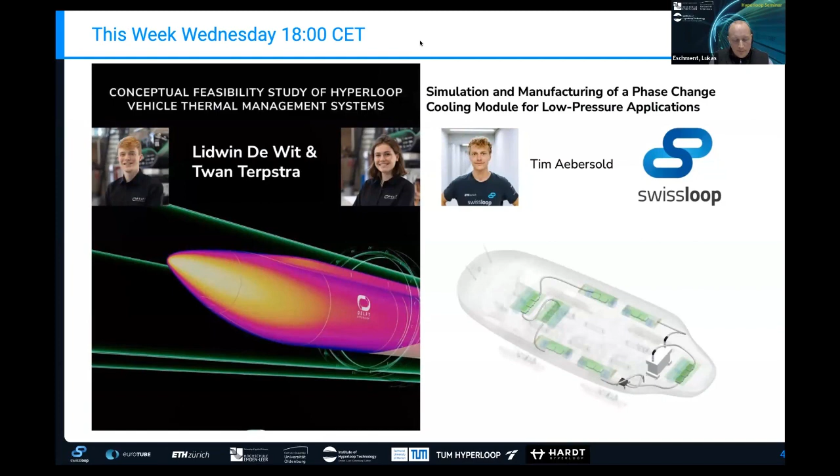So this week, next Wednesday, I hope you all will join. This is a very important topic, I guess, for thermal management systems of Hyperloop. We'll see a lot about the different options, but then also the manufacturing and simulation of a phase change cooling module for Hyperloop. We've seen that last year at EHW, and I hope everybody who wants to take part in next year's EHW can see these talks next Wednesday, because very good talks that we've seen there.

Just an introduction of the hosts, just real quick. Swissloop and ETH started it very early on. I've mentioned that they've put it into the curriculum as well. Very nice to see that Hyperloop has found the way into studies as well, with the teams from Swissloop and then also EuroTube, an organization who is a non-profit, doing research on Hyperloop in an incubator. They will be providing research and development, but also a test facility, and then later on probably branch into certification and regulation.

We have the Institute of Hyperloop Technology, where we are also part of a few projects. We are mostly looking at cargo right now, but then also building our own test infrastructure here at the university, where we'll have a vacuum chamber, and then also looking further to a big, large-scale research infrastructure that will enable something like a 32-kilometer continuous test track that allows for certification of Hyperloop at the end.

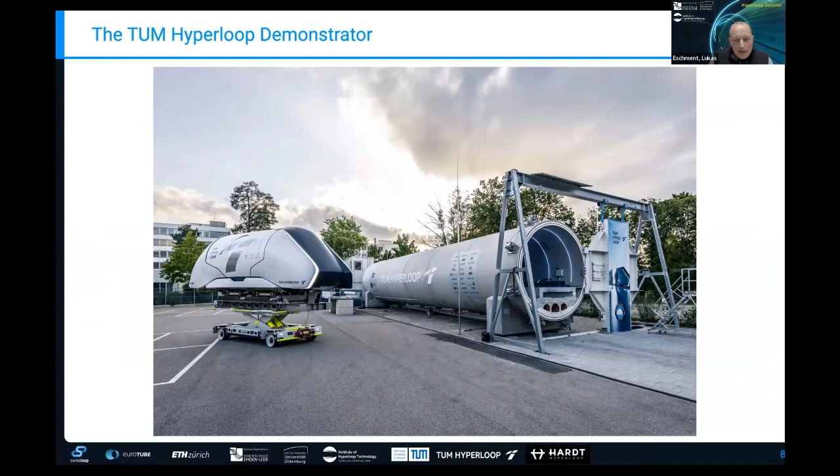We have TUM in Munich with a demonstrator that you've probably all seen recently, which has been finalized in the summer. You probably will see a little bit more about that soon.

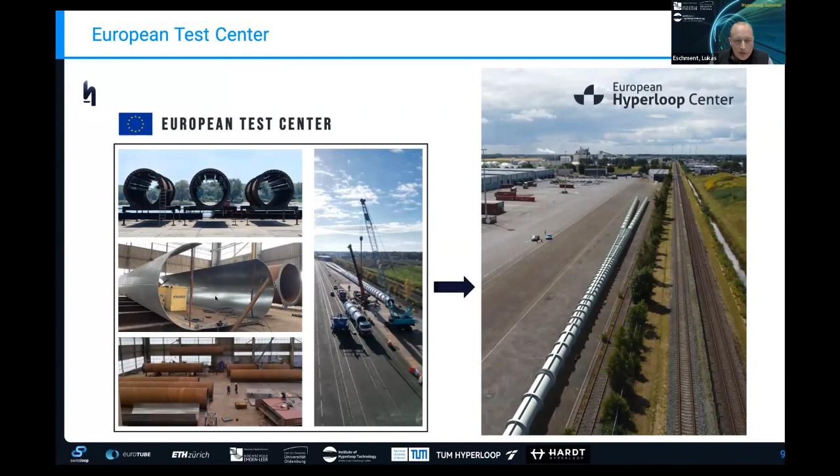Then we have the European Hyperloop Center in Groningen, in Veendam specifically, that is currently being built from Hardt Hyperloop, where you can really see that the tubes are laid down right now. It's very interesting to have a switch integrated there as well, a magnetic switch for the pods, to see that for the first time. That's what it will look like when it's finished.

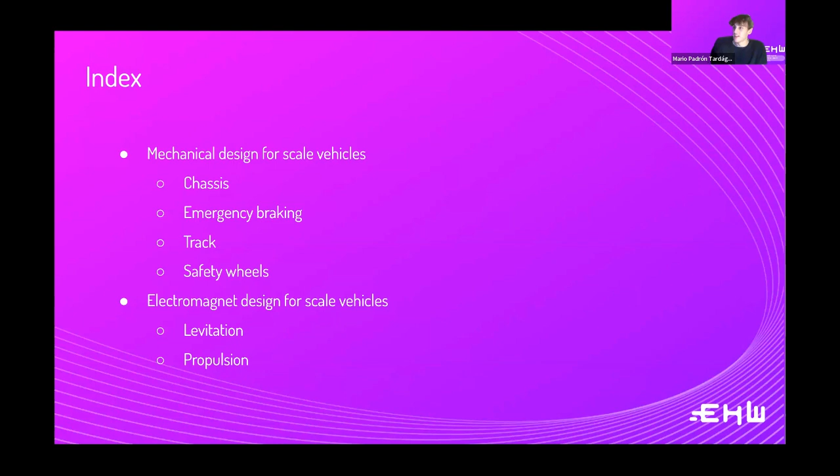There are several parts in the mechanical side of the prototype. We can start from the chassis. We'll focus this session especially on a complete system, since it's easier to provide an overview this way, but feel free to apply this to your specific situation if you're only building specific subsystems.

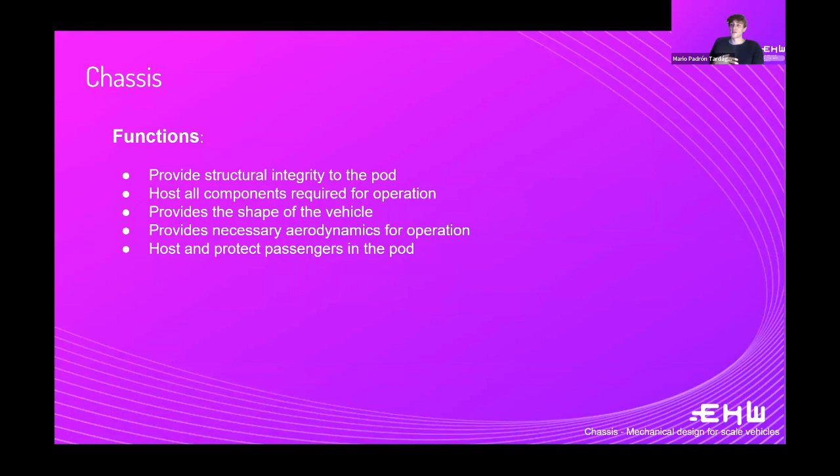The chassis is mainly in charge of providing structural integrity to the pod. It has to host all the different subsystems and keep them in place. It also greatly determines the shape your vehicle can have, and on top of this, the chassis can also be the structure that provides the aerodynamic characteristics of the vehicle. In the future, it would also hold the passengers.

I wanted to include a few inspirations that a lot of teams take from existing industry. For example, an aircraft frame. This is really good, especially in aircraft, where we have a pressure difference between the inside and outside. This circular shape can provide a lot of benefits, including reduced weight compared to other shapes. This could be specifically beneficial for passenger transport, where we'd need to maintain one atmosphere of pressure inside the fuselage.

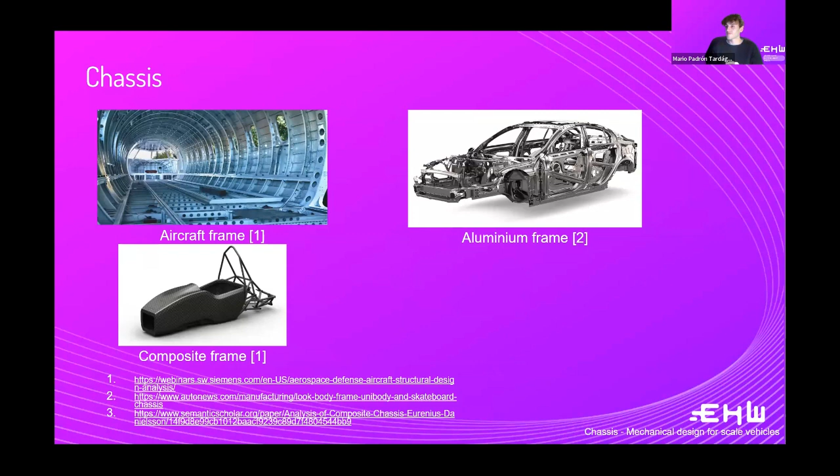We could also consider how a car would work. The teams this year are not bringing passengers, so we don't necessarily need an aircraft frame right now. I think we'd go, for example, for an aluminum structure like it's done in a lot of cars. Similarly, to reduce weight, you could go for a composite frame, normally done with mixes of steel parts, aluminum parts, and composites like carbon fiber.

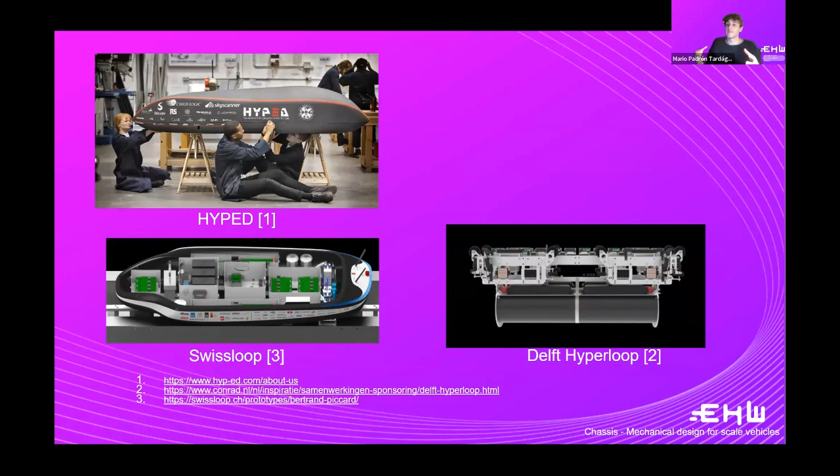Here I have some examples of what teams have brought in past editions. On top you have Hyped's chassis, and on the bottom left you have Swissloop's last year chassis. You can see this one has integrated holding all the components in place and the aeroshell itself to provide the aerodynamics. But in Delft Hyperloop's case, it's mainly made of aluminum profiles, with the aeroshell attached on top. It must be said that if this is done, the aeroshell part also has to be attached mechanically properly — it can't just be held in place with a magnet, for example.

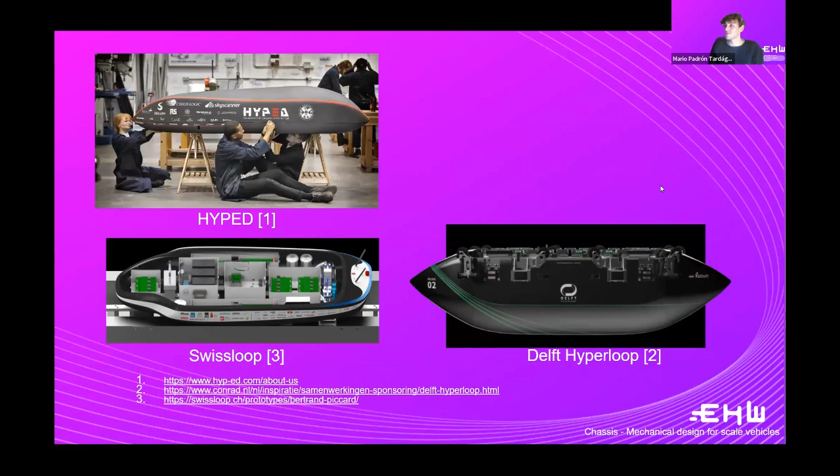Your design will also mainly be influenced by the weight and the materials you choose, as I said, carbon fiber or aluminum. Something we've found very important in past editions for a lot of teams is accessibility of the subsystems. If you have a composite structure that entirely covers the subsystem, it might be very hard to reach specific areas. It's good to take this into account in the early stages, since it can save you a lot of time during testing and make things easier in general.

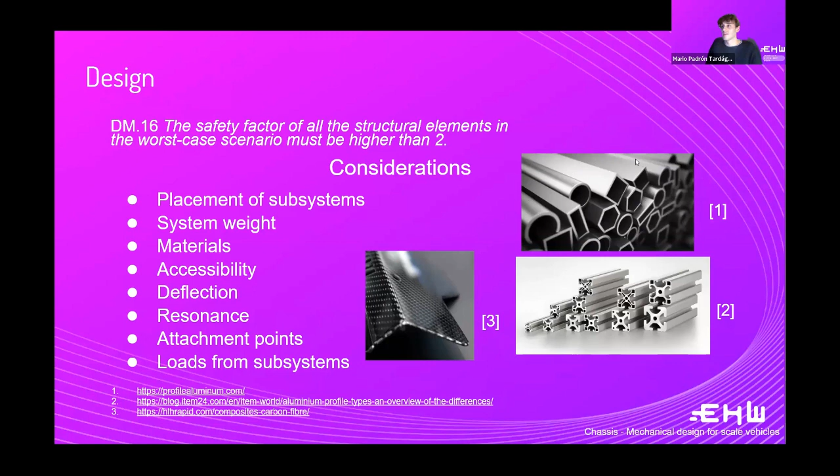Something else to take into account — so you can learn from past years' mistakes — there's a rule stating that the MIDs of the high voltage batteries, must be accessible without the use of any mechanical tools or removing any other parts. As an example, last year Delft Hyperloop's aeroshell did not allow access to the MIDs with the aeroshell on, and therefore the jury required them to make holes so they could be accessed.

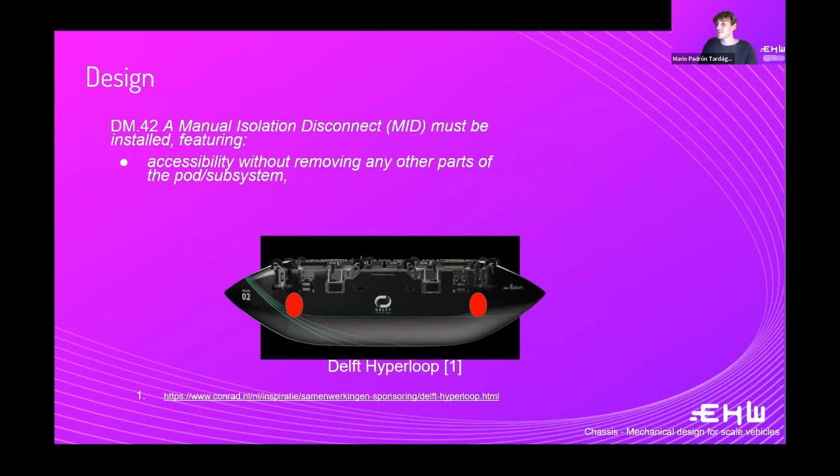Also, take into account that you might get to the competition and surprisingly have to make a quick change in design. If it's an aluminum part, it might be a bit easier to cut, but if it's a carbon part, you will need special tools and special environments to do all of this. So just keep that in mind.

I included a few tests that you could do. The philosophy we would like to approach with tests: we don't want to impose specific tests on you, but we would like you to think critically about what tests you would like to do.

So for example, you will perform a FEM analysis on your chassis structure just to see if it satisfies that safety factor of 2. But to validate that your FEM analysis has been performed correctly, or that your chassis actually follows that design, you want to make tests. One example is a bend test: put a load on the chassis and see how much it deflects. If you compare that to the results of your FEM, you can estimate if the FEM is similar, or if it will perform in the same way that you intended.

Other tests that could be done, for example, is in case you have a levitation system: what would happen if it shut down and your pod fell down, and if the system can withstand those loads. Or vibration tests, because of interfaces with the track or propulsion that can cause vibrations. These are just some examples of tests you can do.

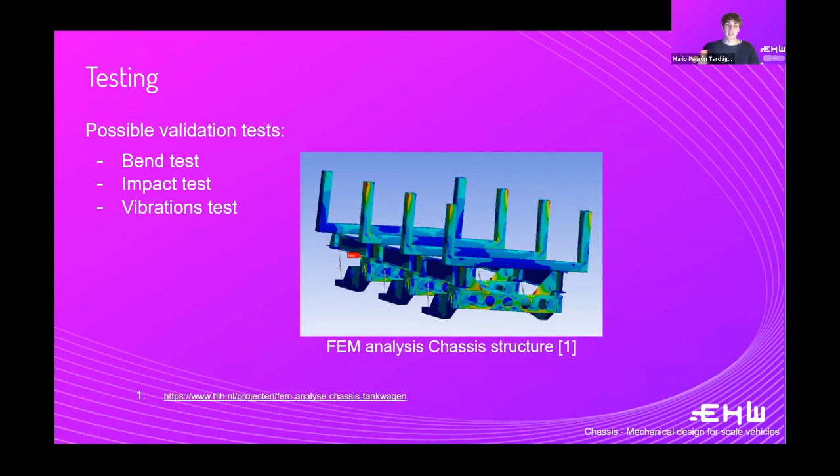Yeah, this was it for the chassis. I don't know if there are any questions. I haven't seen any questions yet in the Q&A tool. Feel free to post anything in the Q&A tool that you have on your mind. I think we can continue, and then if there's more, we'll stop.

Oh, there's two questions. Sorry, I was on the wrong tab for a second. Okay, that is definitely not a question.

You also need to consider accessibility for low voltage systems. I would recommend that you consider it, especially for maintenance and being able to access all the wires that you connect. I believe there's no MID requirement for the low voltage system, so you don't have to consider it in that sense, but it is always good for you to be able to access it.

Do you have a better way of answering the question, Lucas? I don't know, Eshwar, is this what you wanted to hear? Sorry, I wanted you to ask the question. I forgot. Oh sorry, I was waiting for the prompt. Thank you for the answer.

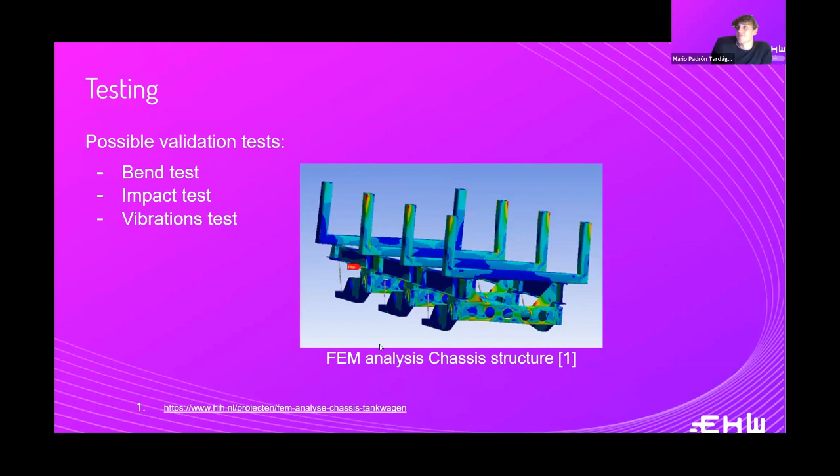And we'll go now into pneumatics as well. So if you have more questions, we can ask or answer. Okay, Mario, then I guess go on. Yeah, okay, let's talk a little bit about the track first.

So the track has to do several functions. First, transfer all the loads from the pod safely into the ground, distribute them, provide a smooth and level surface for the movement of pods so that it's not vibrating all over the place. It could potentially provide a low pressure environment, so a vacuum tube, for example. And also it has to interface with the levitation and propulsion system.

So the design of the track, the configuration mainly will depend on your levitation and propulsion subsystems, and also a lot on the length that you want to build your track.

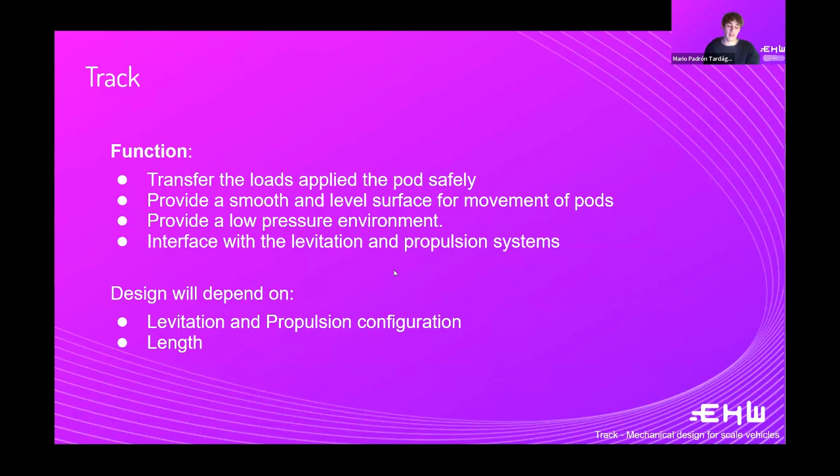So to design the track, there's a lot of things to take into account. I put some here, but you can better get all the rules and regulations from the R&R. We don't have time to go over all of them. But a lot of effort has to be put into integration with propulsion and levitation, especially the most critical loads.

That we have seen are impact, especially if you are levitating and you drop. There's large loads on the track there, so you should be able to withstand that, as well as if there's track misalignments and your vehicle is already touching the track and it hits a bump, that also creates a lot of loads.

A lot of other safety configurations that you must include also are defining safety areas. So if there's any emergency, apart from the procedures of how to proceed from there, where should the people go and where everything can be fine.

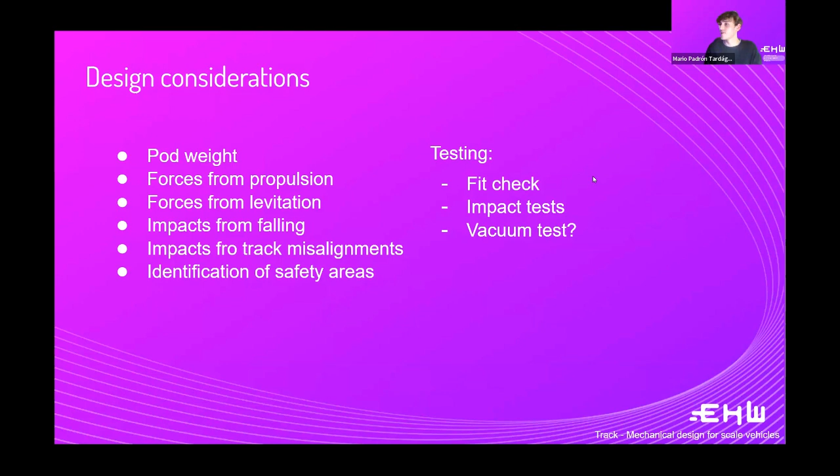Obviously, as well as do impact tests on the vehicle, or perhaps vacuum tests, for example, in the case of UPV. This is from the track side, not too much information, but you can take more a look in the R&R.

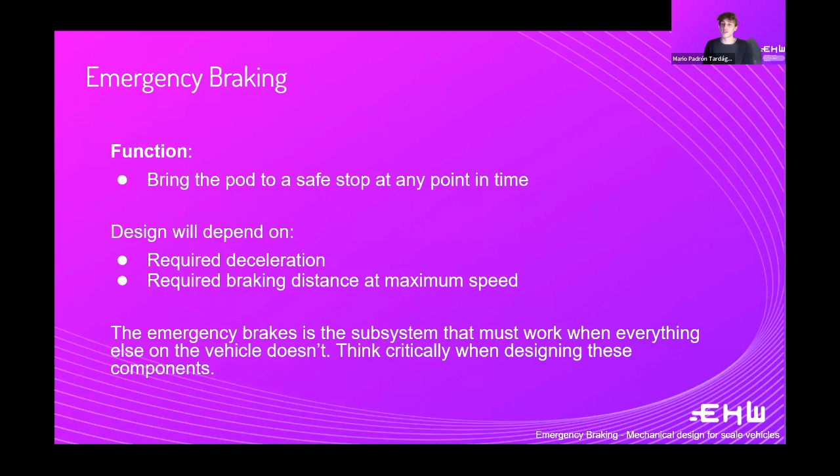We'll start with a few design safety considerations you have to take into account. For example, what would happen if there's a misalignment on the track and you start braking, and your braking pads go over that misalignment? Your vehicle should be able to withstand that. It's something quite important to take into account.

Emergency brake distance, since you will have to leave a margin at the end - we'll get into that later. Materials used, both for weight and for not damaging the infrastructure or the track. And like I said, other integrations with subsystems.

Some important things included in emergency braking: the system should be able to brake if the control signal is not sent. Basically, how these systems are normally designed, there's a control signal continuously being sent to a PCB or a device controlling the brakes, and whenever that signal is cut, the brakes will automatically deploy.

This is done especially so that if there's a power loss, the brake will deploy and there's no chance that the signal to brake is not sent. So basically the signal to not brake is continuously sent, and when something goes wrong, that signal is no longer being sent.

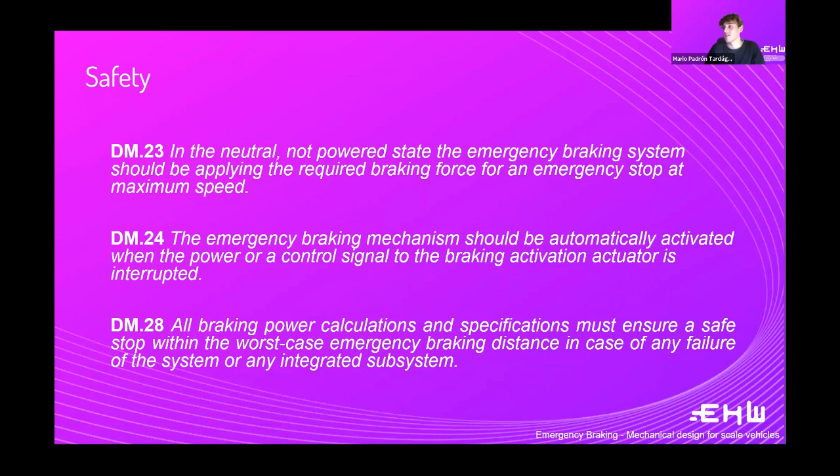Regarding the braking distance, you must leave a distance at the end of the track of double the braking distance at maximum speed. This means you leave quite some space at the end. A lot of teams find it very important to brake within a really small distance, so that it maximizes the amount of space you have to perform your pod run. Something to take into account.

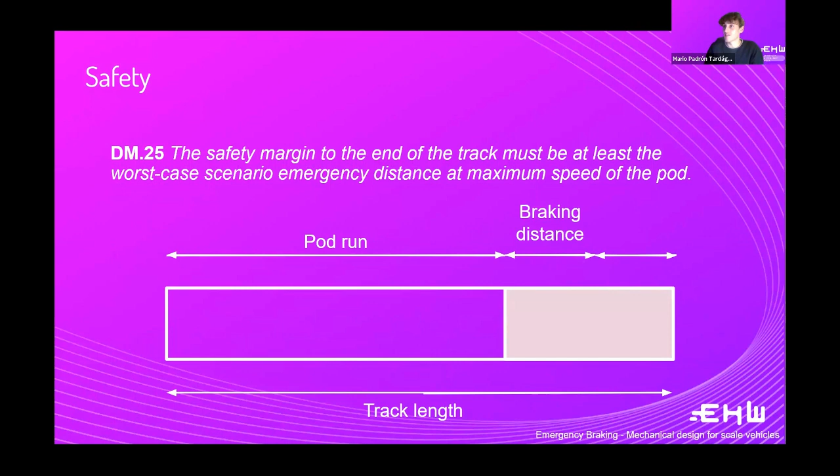Something else important is that the forces you apply must be done in a symmetrical manner. This has a lot of implications. For example, if you decide to brake on only one side of the pod, you have to think that then there would be a moment and your pod will tend to yaw - that's not symmetrical braking, so this wouldn't be allowed.

The only way that the braking shouldn't be symmetrical is in the direction of travel - that's why we want to decelerate the vehicle. So some ways to brake, for example, on the I-beam, involve applying forces in the directions shown here in this image.

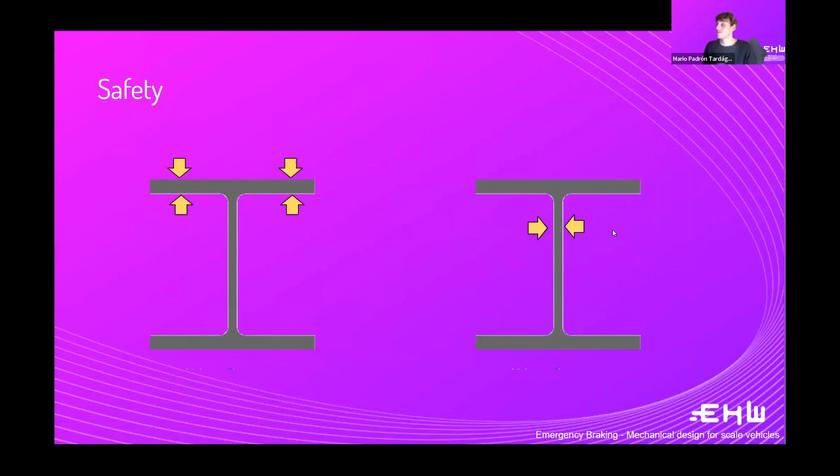Something else very important is that braking can be done with pneumatic friction or electromagnetic methods, but if done through electromagnetic braking and energy is being restored, you must test how much energy is being restored and handle it accordingly. Sometimes the batteries, for example, cannot take back that energy properly, so it has to be converted in some way. This has to be thoroughly tested as well.

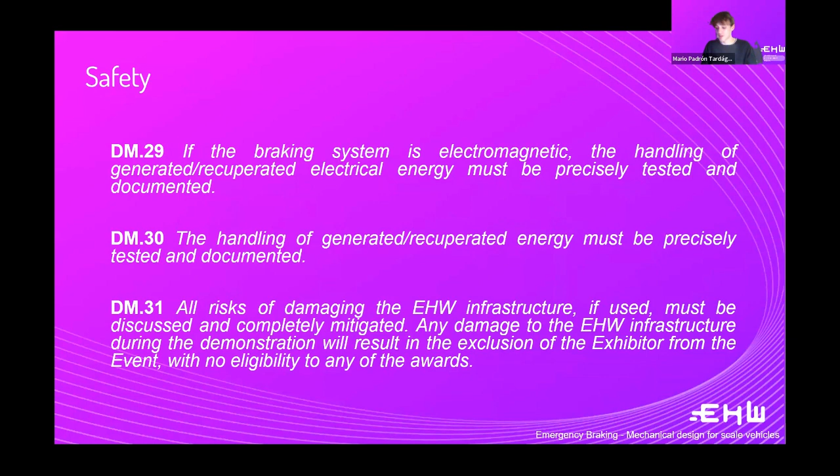Let's go into a few examples of braking systems that are used - mainly you can divide them into two. Friction braking, which applies a force directly through contact with the track, or electromagnetic braking, which is done mainly through creating eddy currents on the track, or creating a field opposite to the one present on the track to slow down.

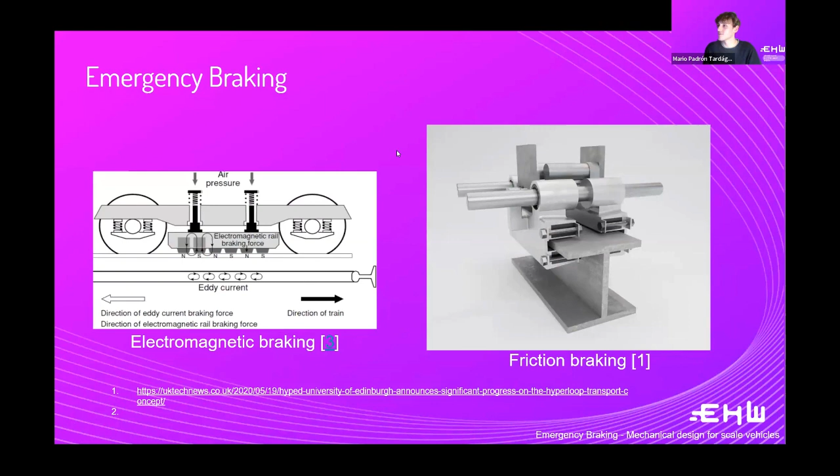Some ways that the deployment of the brakes can be done are direct or indirect. Direct refers to having a pneumatic system where gas is trapped, and once that pressure is high, the system is deployed. Indirect refers to when there is no pressure, the system is deployed - so basically they're opposite to each other. And on both sides, we can find either pneumatic, hydraulic, or electric systems.

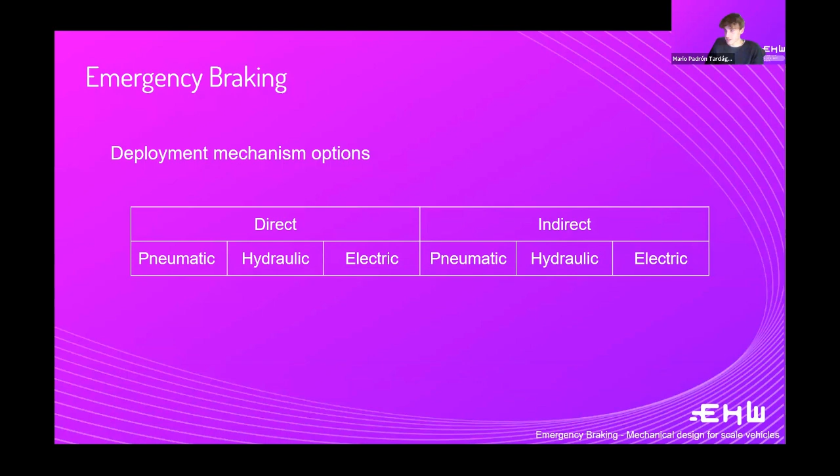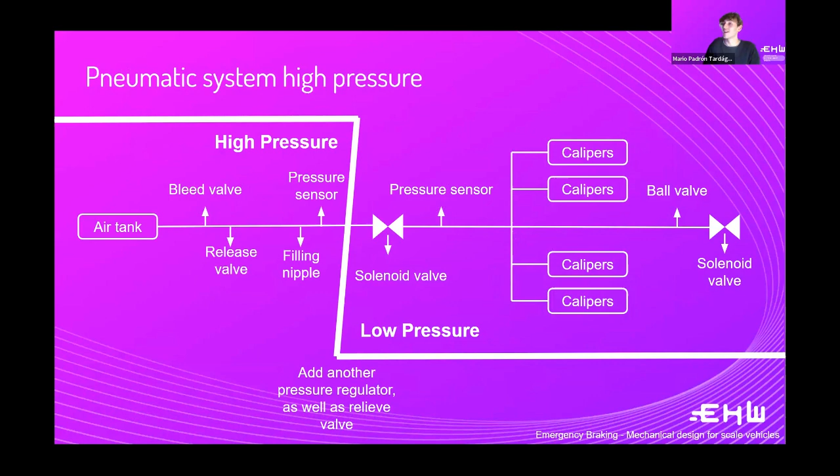For hydraulics, I don't have a lot of knowledge on that, so I would recommend you do research of your own. The systems are quite similar to pneumatics, but the springs are normally placed earlier in the diagram, so that one spring can activate all the calipers.

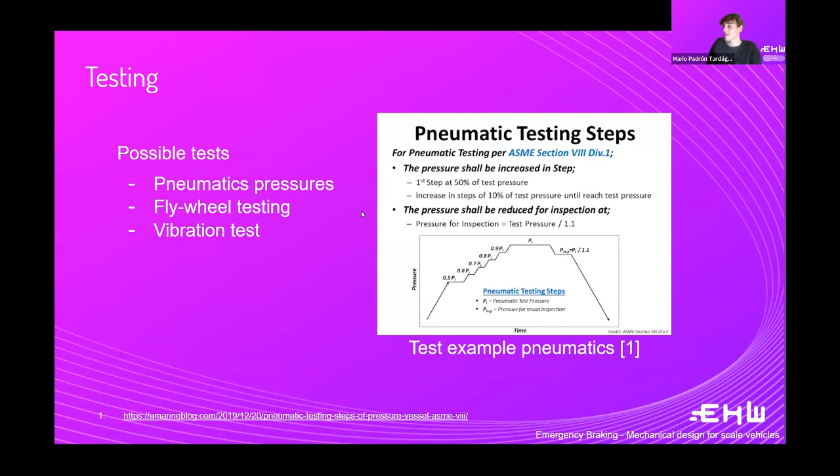So that was it for the emergency brake side. Do we have any questions? I don't see any questions yet. Maybe we'll give everyone half a minute to ask some questions if they're still typing.

In that time, I can still answer Nick's question. I hope you don't mind if I answer it right away, and if I should elaborate on one point more, I can do that. What's going on with China and the T-flight system? Oh, sorry, do you want to ask yourself?

I've been in this Hyperloop business before it was called Hyperloop, with ET3. I met with Musk 3 weeks before he released his paper, so I've seen this whole thing evolve. The whole time, if you look back at the history, the Chinese have been there, and they invited Daryl Oster in 2003. They've been developing high temperature superconductors and maglev systems.

Just recently I decided to see what's going on with T-Flight. They have a LinkedIn page, and I was surprised by the amount of progress they've made. They have a full-on testing facility down there, very similar to and maybe even bigger than what's going on in Europe. They have vehicles going very fast using high temperature superconductors. So if the goal is a global system, shouldn't the Chinese be involved? What's going on with them?

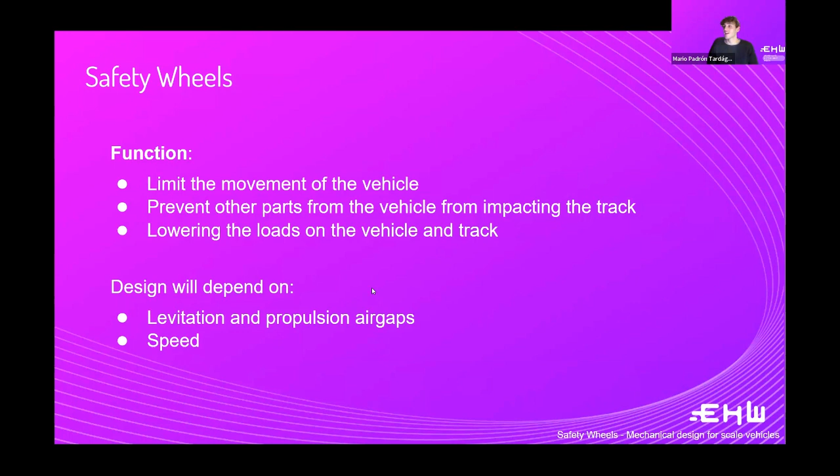So the safety wheel design will be influenced a lot by levitation, propulsion, and also the speed that you will attain. Some considerations you might take into account when designing your safety wheels are, for example, the maximum accelerations that your electrical components can handle. I know a lot of teams also use like 10 Gs as a maximum, but you have to look at your specific electronics.

The loads the wheels themselves can handle, if you have bought them, what they're rated for or what you have designed them for. Balancing of wheels so that they spin correctly around an axis. How much they would compress in case they would fall from a levitation system, for example, or during a normal run. It might also be interesting to know the static compression.

The material of it is also very important so that it shouldn't damage the track, especially if you're using the EHW infrastructure - there are rules on that, want to refer to the R&R. And then some possible tests that you could do with them.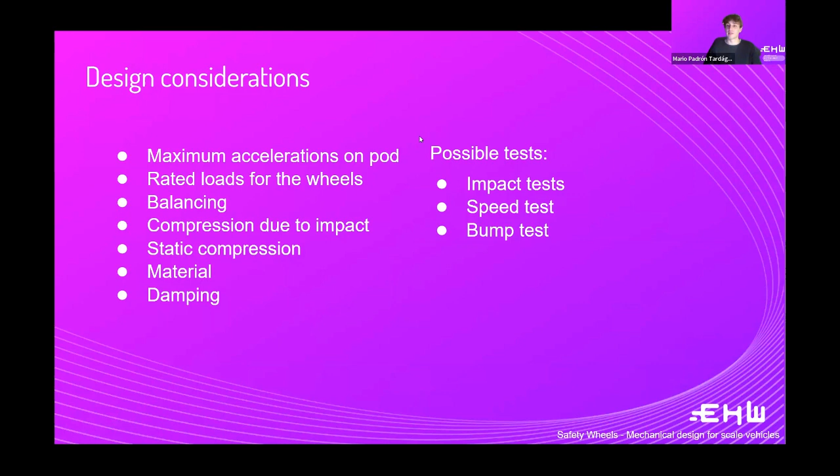Impact tests, so this would be together with the chassis. Some speed tests, for example, to see if the wheels can handle the loads there, or what would happen if the vehicle would ride into a bump in the track and misalignment there, if they would be able to handle it. I put here some examples of wheels that teams bring sometimes.

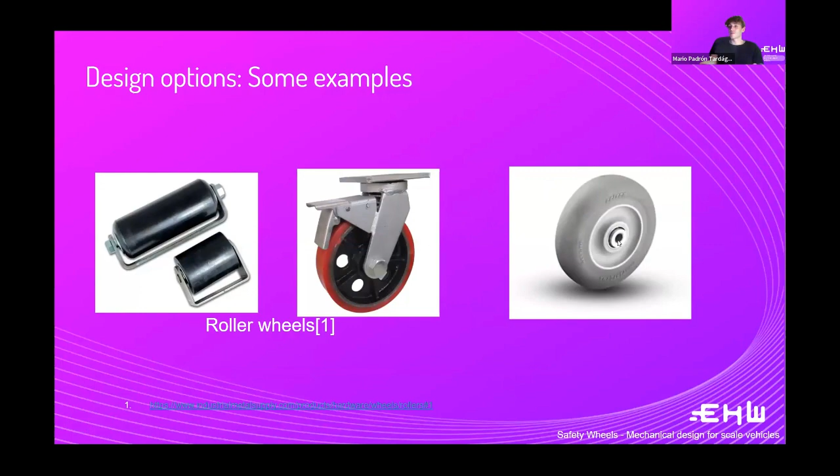Like you have roller wheels, well these are used in carts for example. I haven't seen them in the competition too much. And then on the right, some teams design their own brackets and just have their custom wheels in this sense. So here you have some inspiration.

So let's get now into the electromagnet design for scale vehicles. We'll start with the levitation system and then we'll go into propulsion. The levitation system has to mainly keep the vehicle from touching the track as much as possible, also keep it at a stable air gap so that the motor can operate optimally, and damp all the internal and external disturbances, such as the effects that drag has on your vehicle and the motor as well.

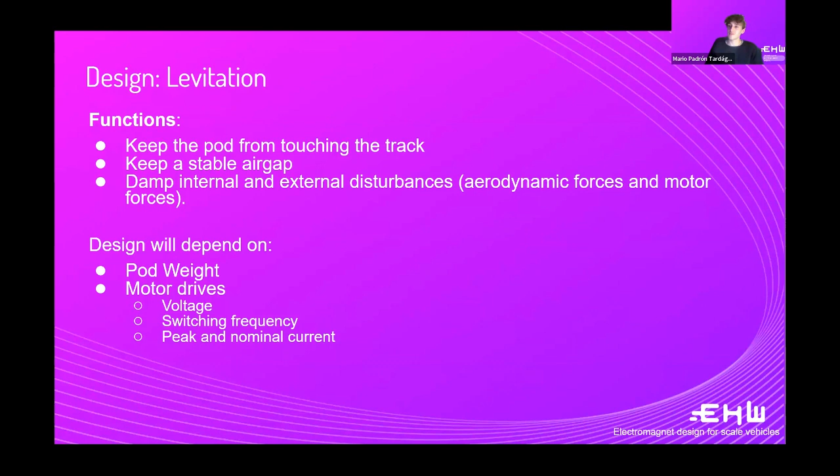Your design will depend mainly on the weight of your vehicle, and a lot as well on the motor drives that you can have or use.

Commonly in the past editions, the main systems that we have seen are EMS, electromagnetic suspension, HEMS, which is a similar version but uses magnets as well, and electrodynamic suspension. The first two are systems that need an active control in them. They're unstable or neutrally stable, so the air gap has to be controlled by the current that is run through the coils.

You can see on the bottom of the slides the working principles. You have some papers also there that you can check out. The electrodynamic suspension is referred to normally, for example, used in an aluminum track where your vehicle contains a magnet, and by going fast throughout that aluminum track, a counteracting magnetic field will be created on the aluminum structure, which will basically make your vehicle levitate.

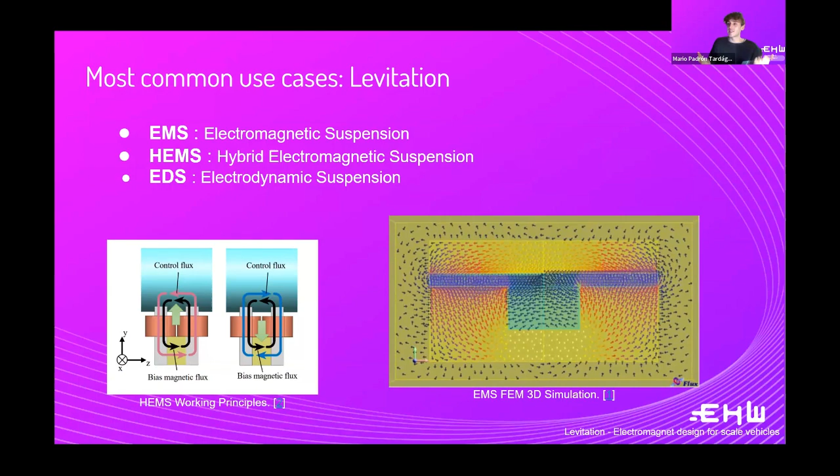So in this sense, it's passively stable, in that if you get further away from the track, the forces will decrease and you will reduce your air gap, and the opposite also applies. If you get closer, your forces will increase and your air gap will also increase. The choice depends on you and what you want to accomplish.

Some other options haven't really been seen in previous editions, but are also out there you could potentially use. You could look at the SC maglev - Lucas talked about it before. They use figure 8 coils to achieve stability. There is Inductrack as well, which is used in a few projects.

We have rotating permanent magnets. You can watch a very cool video by Veritasium about them. Be aware that they will make your track heat up to the point where you can boil water, so watch out. And then you could make use of the Meissner effect with superconductors and a magnetic track, for example.

I included here at the bottom a reference to the Hyperloop seminar. There's a lecture specifically talking about levitation systems. I looked through it and it has a lot of information about them, so I really recommend it.

And then specifically, different parameters that you have to take into account, characteristics of your system when designing it. So if you go for a HEMS or EMS system: what material your core is going to be made of, what geometry to guide the flux lines in the correct way, will the material get saturated.

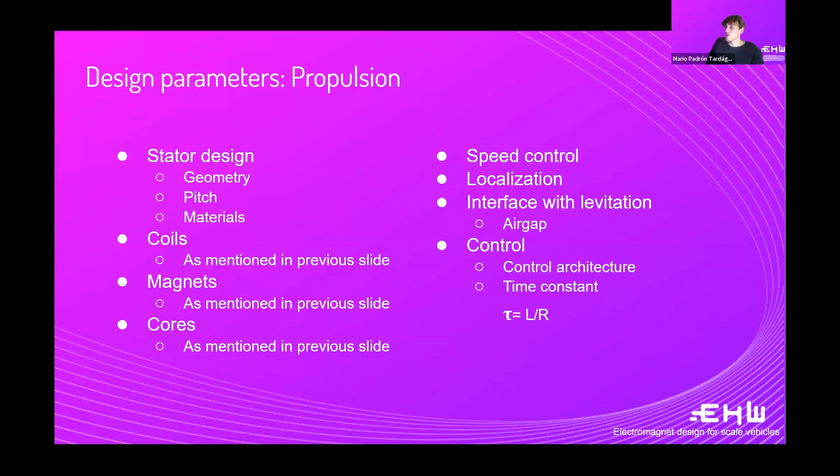Also here, you need a control architecture to handle the currents that you're sending with your track, and again an interface with levitation.

It's important to take safety into account in these two subsystems. I'll treat them together since there's a lot of common things between them.

One other thing is the magnetic field around them. This is especially important for people with pacemakers, since they are very susceptible to this, but it's also very important for preventing tools from flying towards your magnets.

So there's a cover that you must place around your magnets whenever they're not being used. Once you arrive to the EHW location, you will have to have your magnets covered the whole time until inspection has happened, and whenever your magnets are not being used, they have to be covered as well.

If you do have permanent magnets on your vehicle, you have two options to build a magnet cover. It can be big enough so that at that distance the magnetic field is less than the required amount, or you can make it smaller and build it of a ferromagnetic material so that it guides the field lines in such a way that they don't exit the enclosure of that cover.

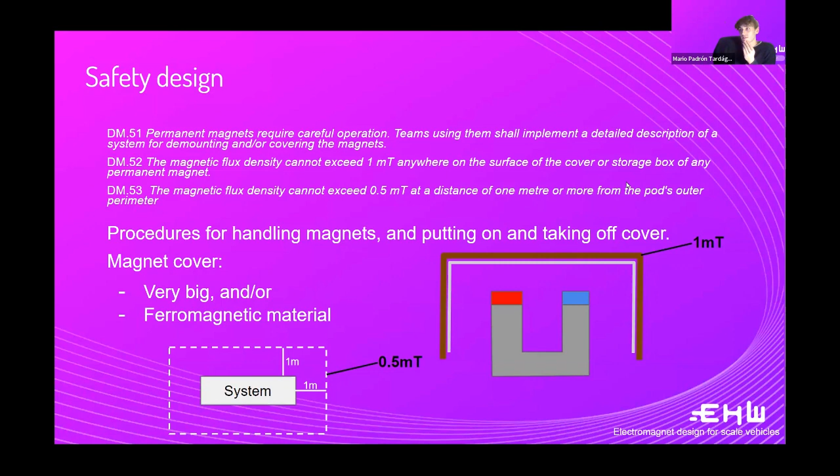In addition, I would like to have special focus on the coils, since they carry high power, high voltage, and high currents. They're very dangerous parts of the systems.

What we have seen in other years is fixes, also last minute, to insulate the coils from the chassis and from other brackets. So we really recommend, first, to have an insulation layer on your copper wires, so that they don't touch each other and create shorts or problems there.

Something that has been done in other years is, for example, an epoxy coating around it. The coils are submerged in epoxy, which is then cured and hardened so that no copper is exposed to the outside.

Something else is that the coils must be mechanically secured so that they don't fly around. You could do this either with the epoxy itself, attaching that epoxy, or just have a non-conductive bracket in some way securing those coils.

Lastly, I would like to talk about the integration with propulsion. This is mainly what I focused on last year for my design. I just wanted to give you a little bit of an idea of how I thought about the integration with safety wheels and propulsion.

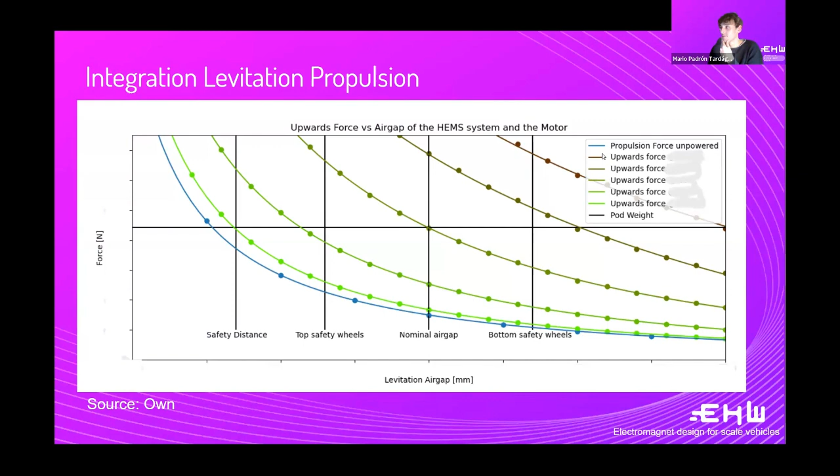Yeah, so this was it from my side. Yeah, I would like to. Okay, I don't see any questions yet.

Just to make sure, from a jury and scrutineering point of view, when you look at the pods at EHW in Zurich, it's very nice to see a coil with a connector that you just plug into a wire, that plugs into your inverter, that plugs into your battery, and so on. Not just two cables put together with some isolation tape, or something you need to isolate afterwards because you forgot to do it before in manufacturing. So it's very nice to have all of that together.

If you have had questions, just put them in the chat. We'll wait a second for that. I like the levitation part of the Hyperloop seminar. I think that must be mine, right? Or is it someone else? I don't know, I think I've had one as well there. Yeah, could we? I've seen.

We could probably talk about magnetic levitation for hours, so we won't bore everyone with that.

I like the HEMS as well. Maybe somebody, I've said that at EHW in Delft as well when it was in the Netherlands, I want to see someone do a superconducting HEMS or a superconducting EMS with longer, higher forces, bigger air gap, something like that. Would be very, very great.

I don't know if you've mentioned that. Oh no, I was just going to say then we'll have to set up rules for cryogenic cooling. Yeah, that's true. I don't feel they are too dangerous because you can just pull off your hand, so don't stick your hand in it. But I feel like they could be kind of safe. Yeah, and you need to see where you get your liquid nitrogen and so on.

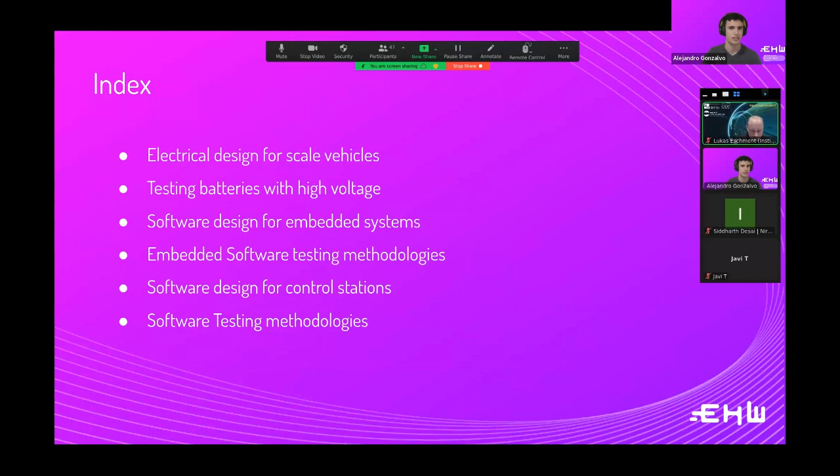First of all, we will be looking at the index. We will be seeing first electrical design for scale vehicles, then testing batteries with high voltage, and then software design for embedded systems and embedded software testing methodologies. Actually the last two sections at the end were removed because we included in the embedded systems section, as we thought there weren't any specifics of control stations that warranted extra slides.

So let's start with electrical design for scale vehicles. First of all, we have our electric system, which is mainly made of batteries, and we have to characterize those batteries.

Here are the most important characteristics about them: the nominal voltage of the battery, the discharge curve, the capacity, the energy density versus the power density, which is a performance aspect we want to look into. And then there's the internal resistance of the battery, which relates to how old the battery is or how many life cycles it still has.

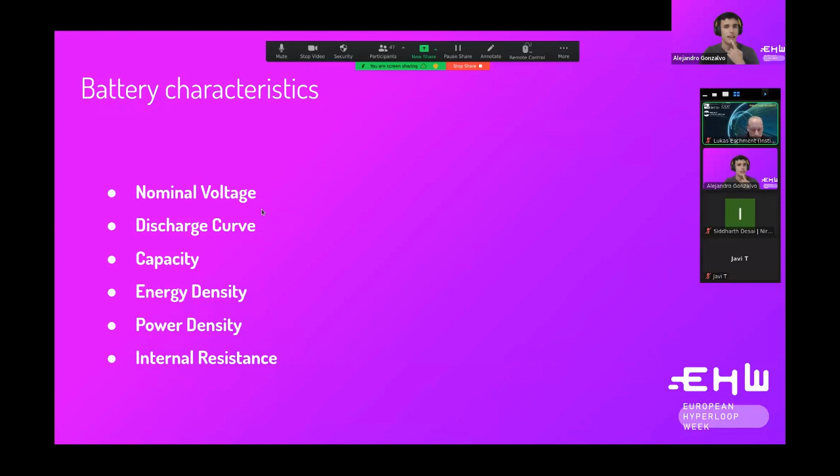So let's start with the basics in case someone missed it. This graph is very important. It's like the main graph you may find in any datasheet about batteries.

First of all, the nominal voltage of a battery is its minimum voltage output during normal operation. So what does this mean? Here you have this graph, and what it shows is the amount of voltage the battery outputs on the y-axis versus the capacity it has. So unluckily for us, as the battery depletes, it outputs a different amount of voltage. It starts, for example, in LiPo batteries with 4.2 volts, and it depletes until 3.3.

So first, the flatter the better here, for the simple reason that if you have a battery that at 100% outputs a big amount of voltage, and then at 0% outputs a very little amount, then you have to do more dynamic conversion with the hardware, voltage converting, and so on.

So first of all, we have the nominal voltage. The nominal voltage is exactly this line here, and it's the minimum amount of voltage you can use during normal operation. Normal operation is defined on the linear zone here. We have the nominal region, which, as you can see, is a straight line. And this zone is the one we want to use, for two reasons mainly.

The first being that the exponential zone on the left and the exponential zone on the right, as the name says, are not linear. So when you want to calculate what percentage the battery has, it's very difficult because you cannot do a simple linear formula. The second and most important reason is that it's not safe for the battery, it's not safe and it's not healthy. So if you work between a percentage around 20-30% and 70-80%, the battery will just work much better.

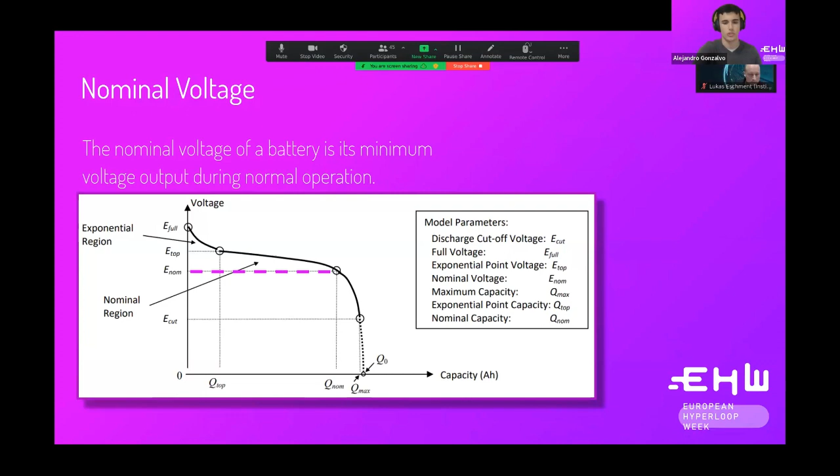Next point, we have the discharge curve, already explained: it illustrates how its voltage changes over the duration of its discharge.

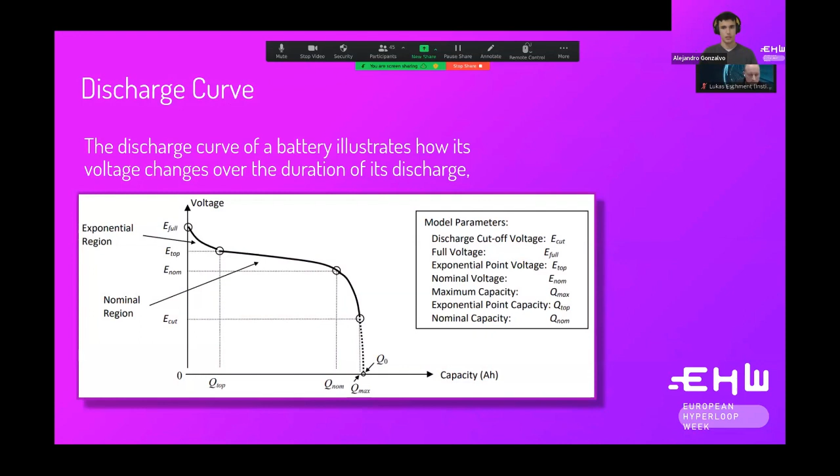And I said you want to keep it in the linear zone, so not much to say over here. Okay, so let's go now into the capacity.

So the capacity is defined as the amount of electric charge it can deliver, and is typically measured in milliampere hours. This is a very interesting unit, but basically what it means is that if a battery has 100 milliampere hours, for example, if you're working at operation conditions of 100 milliamperes, it will last an hour. And if you work at double, if you work at 200, it will last half the time. It will last half an hour. So that's the standard way of measuring.

Here you can see what I said, which is the usable capacity and the total capacity. So as you see, the usable capacity is smaller because there is this exponential zone you don't want to enter for the safety of the battery.

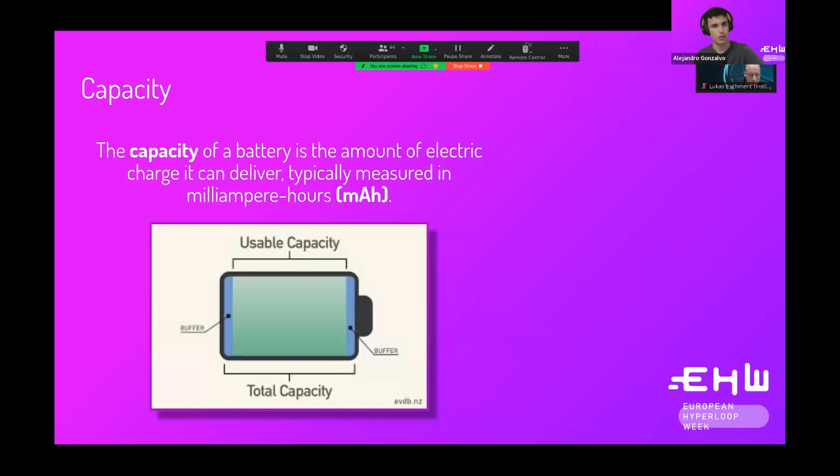So next up, we have energy density versus power density. These are the main performance characteristics you will want to look into when comparing battery packs at the competition, and when comparing battery packs yourself at home, when you want to decide which are you going to buy for your vehicle or are you going to construct.

So the energy density is the measure of how much energy a battery contains in proportion to its weight, and it's measured in watt hours per kilogram. Okay, let's go into power density and we'll see the metaphor afterwards. Power density, on the other side, is the measure of how quickly the energy can be delivered, and it's measured in watts per meter cubed.

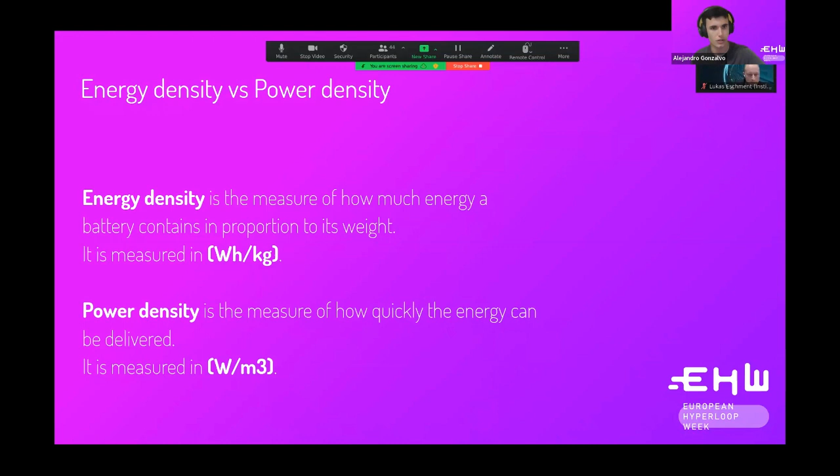So first of all, we have energy density. Here's a very simple metaphor. This is not very orthodox, but we'll assume that in this case the amperes of the battery make up to the caffeine. So in this case, we have a coffee that is 12 ounces, and then we have 2.7 cans of Red Bull that is around 30 ounces. As the coffee has the same amount of caffeine in less ounces, it has more energy density.

So for battery capacity, it would be the same. If you have a battery that is a liter in volume and it has more energy than a battery that has 5 liters in volume, that is more energy dense. And then for the power density, it is how much power it can output at some point.

So why is this important? For example, for your high voltage system, you will want to prioritize power density over energy density. Why? Because your demonstration at the competition won't last half an hour. It will last 30 seconds, because your vehicle turns on, then it goes, and then bam, it brakes. So what you need is actually some batteries that can output the maximum current possible in the least time, so you can accelerate very quickly.

While for your low voltage pack, you will want to have more energy density, or you will want to optimize that. Why? Because you will be working with your boards, with your control systems a lot more time. For example, on the scrutineering, you don't want the jury to come at the scrutineering and say, okay, my vehicle has 3 minutes of useful lifetime.

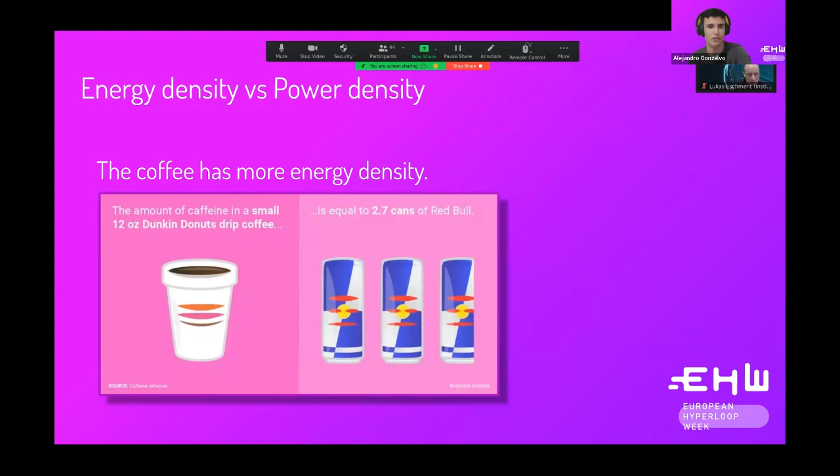So then they start doing the scrutiny and we need to charge it, and then you charge it again. So you want at least a reasonable amount of time. Let's say half an hour, 40 minutes is something that starts on the reasonable.

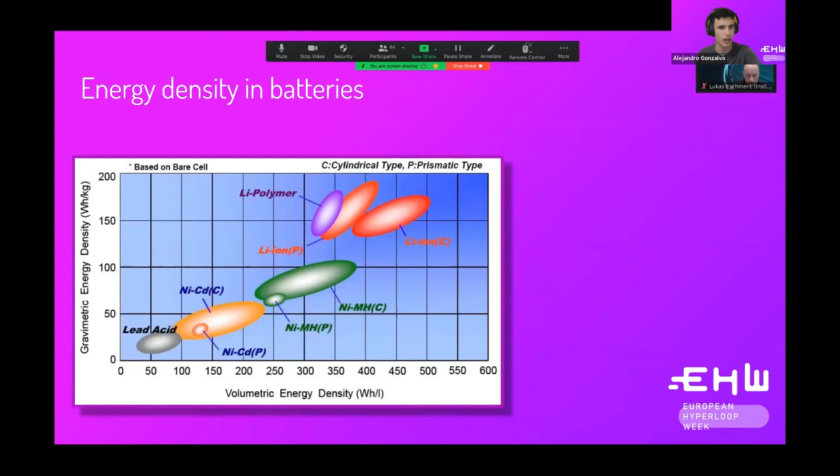But then on the x-axis, we have the volumetric, which is something you will care more about, because we are talking about the space of the vehicle, and you will want to make a vehicle as small as possible generally. There is no graph here on power density, but, a very important point to simplify this presentation, lithium polymer has greater power density than lithium ion, generally. I mean, there could be some exceptions, I don't know, but I believe that's how it is.

So, lastly, we have the internal resistance.

So here we have this graph in which we have our generator of energy, which in this case is the battery, and then we have a resistance. We have a very big resistance, which is the one of our system, the one in our vehicle. So this resistance should absorb all the voltage that's outputting from the battery. But in reality this is not true, because there is a very small percentage that is sucked, let's say, by the battery itself. So this is the internal resistance of the battery.

Different batteries have different internal resistances, and they also grow different with the life cycle. So what happens when a battery gets really old and you charge and discharge it a lot of times is that the internal resistance increases a lot, which causes reduced efficiency. And eventually it's not only an efficiency problem, but also a temperature problem, because if the resistance is higher, it starts consuming more current, and eventually it heats up, so it's not useful.

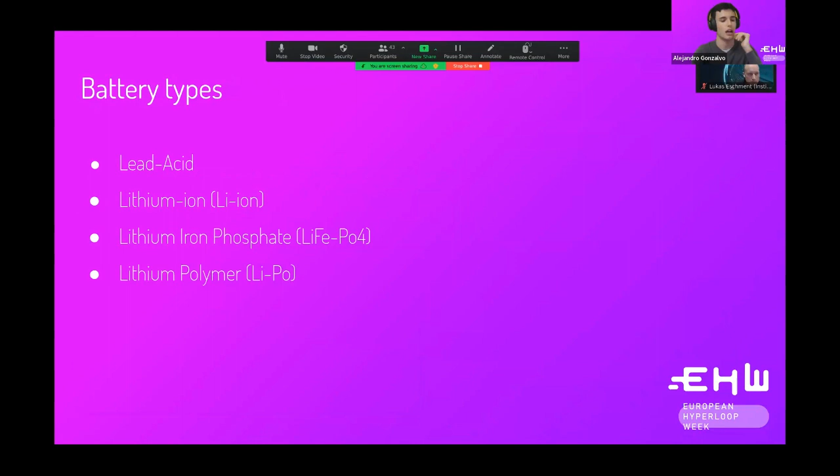Okay, now let's see some battery types. I'll go pretty quick on this since I don't want to take much time. With lead acid, this is your car battery, so it's common, cheap, reliable, and heavy. It's used in cars, and the problem is that it suffers from lower energy density, so it's not a good candidate for Hyperloop vehicles.

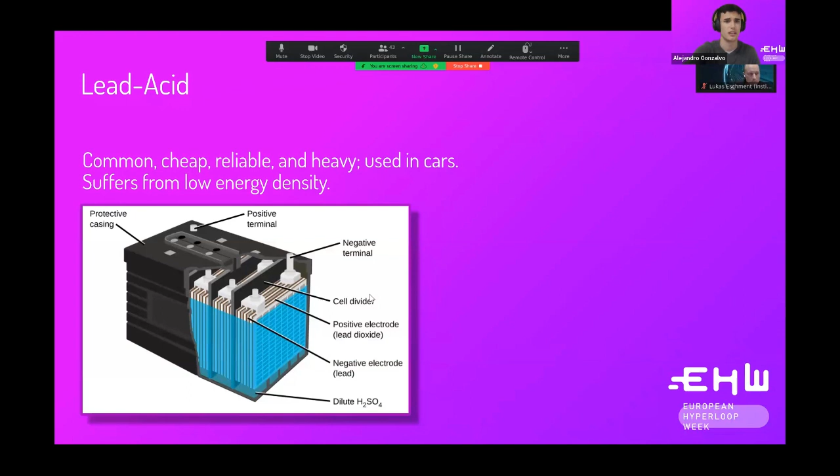Then we have lithium ion, which have very, very high energy density. They are lightweight, but they are pretty expensive, and they are used in modern electric vehicles. So yes, you could deduct that they are essentially a very good candidate for using in vehicles.

And then we have lithium polymer, which have also very high energy density, although a bit less, I believe, than lithium ion, and they are very lightweight. Being very lightweight causes them to have greater power density - regarding weight, they can output more power per kilogram. And very important, they are sensitive to mishandling.

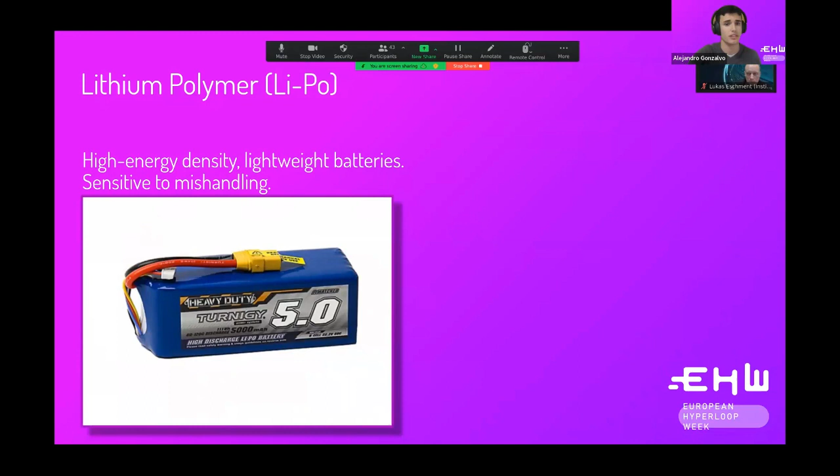And then we have lithium iron phosphate, which, although not used at the competition, I believe they are a good option. They have been used recently by some companies. They are safer and longer lasting than most lithium, but they are less energy dense. So of course, if you don't have a lot of spare space in your vehicle, you cannot use them, because you will want to optimize as much space as possible.

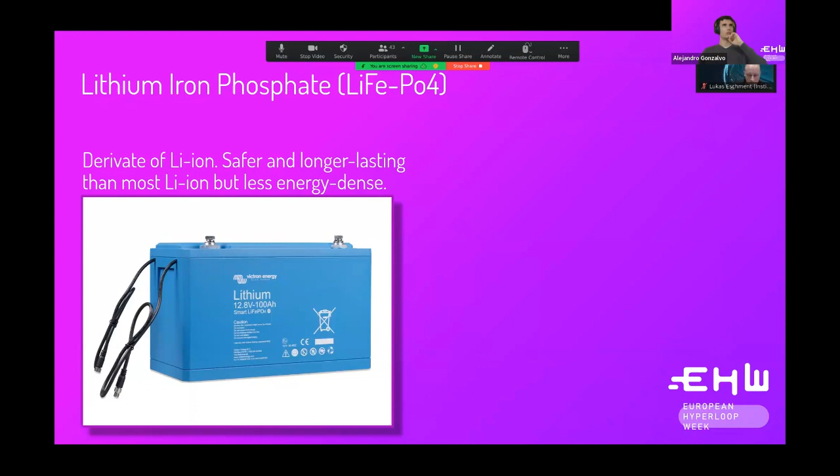And there's something I want to point here, and that is: why should I care about the internal resistance of the battery? It's like, okay, but I'm just going to use my vehicle for a year, I'm just going to use this system for very few time. But I think in this context of this competition it's even more important, because imagine you mistreat your battery and use it 0 to 100% all the time, which is also very risky. Let's say best case scenario, the battery doesn't catch fire and you just have a very used battery.

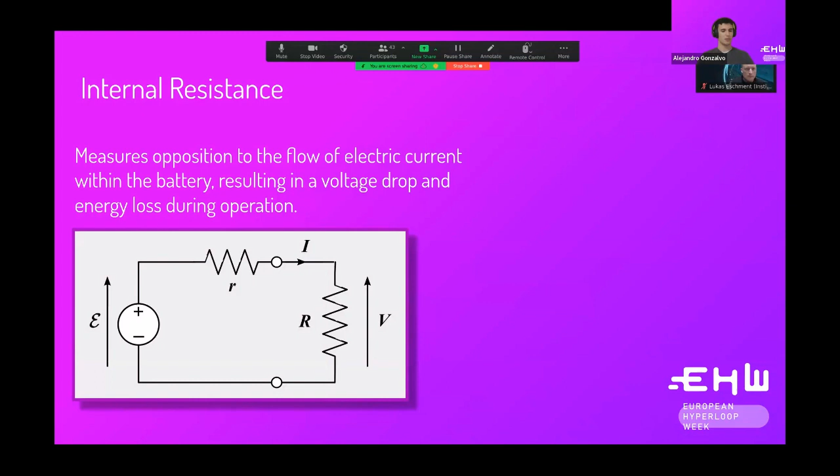And then the next year, your college or your public organization comes and says, okay, what happened to this battery? And you say, oh yeah, well, I used it very badly, so now you have to spend 1,000 euros again to buy a new pack. So we don't want that to happen, so always try to keep batteries in the 30 to 70 range, which is the safest one.

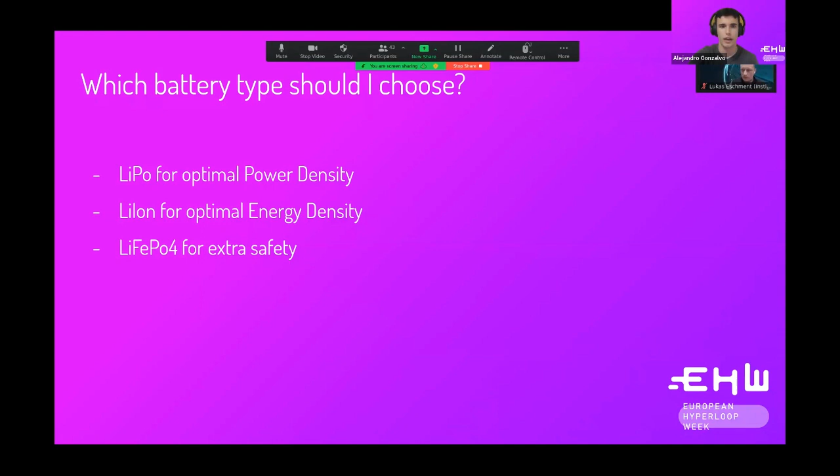And here's the conclusion. If someone missed it, which battery type should I use? So we want to use lithium polymer batteries for optimal power density, and we want to use lithium ion batteries for optimal energy density. Okay, and then some design concerns, very important.

It's like a rule of thumb: leave a safety factor of 2 for the rated current of the system, and always leave a safety factor of 3 for the rated capacity of the system. So what this means is that if your total system, your motor and your guiding system, needs, let's say, 200 amperes, your system should be able to output 400 of continuous current, because batteries have 2 rated maximum currents.

They have the continuous and they have the boosted current, or boost current. So basically the continuous current is the one that they can continuously output in time as long as they are alive. So if the battery says 300 amperes, you can output 300 amperes from the battery all the time until it gets to 0%. But then they have another current, which is the boost current. For example, a battery with 300 amperes of continuous may have 200 more amperes for boost current.

And this is a current that the designer of the battery or the manufacturer says you can use it for 3 seconds or 2 seconds or 10 seconds. It's normally specified in the datasheet, and it should only be used in exceptional cases, only to be used in very, very specific cases.

And then for the safety factor of 3 for the rated capacity, I think this is pretty obvious. If your system needs a capacity of 10 for a high voltage demonstration, don't have batteries with a capacity of 10, because then when you turn on your vehicle, the batteries will have depleted a bit, and then you cannot do the demonstration.

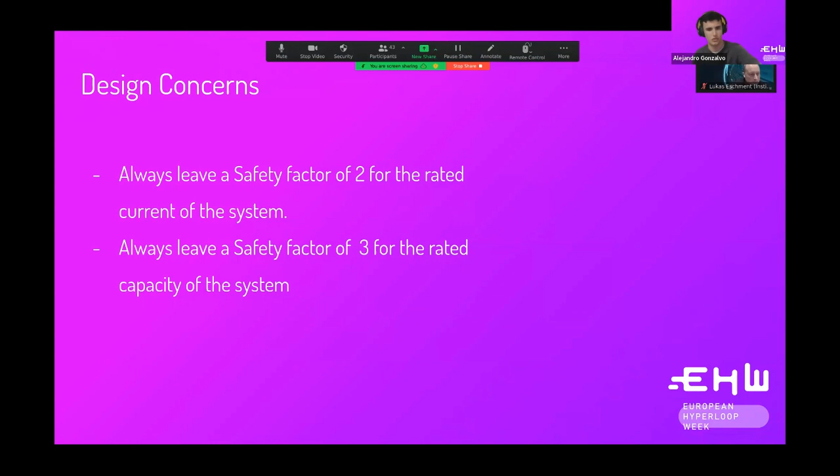Okay, so now let's go for the study case with the Swissloop high voltage battery, which is probably the maximum high voltage battery you would want to make. I don't see any reason to make a battery that has more consumption than this one.

So as you see here, the design is pretty clear. You need as much power density as you can. So you grab as many LiPo batteries as you can, you put them in series, and you don't worry about the capacity. Well, you're worrying a bit because LiPo batteries are also pretty good, but you're not aiming for that.

As you see, there's not a single pack in parallel. There are 24 packs in series. And yeah, there's no more to say about this. It just gets the best ratio of power to weight.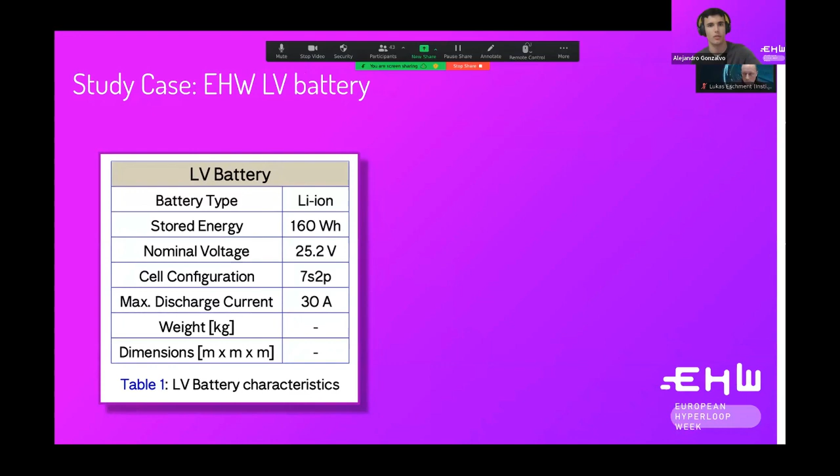And are there any questions up to this point? I don't see any yet in the chat, but I guess we'll give everybody a little time. I think in the last EHW awards, when putting something in a vacuum chamber to test, do the teams have to provide the power through low voltage battery for the whole test run? And remember that it could take longer than they might anticipate. Or if there's a vacuum chamber, can you also use a power cord or something? Also, when you're doing your own testing at home, what should be the consideration there for the teams?

Okay, I don't know if I understood the questions, but if the question is that if team can use the batteries in a vacuum test, I believe that a low voltage battery should be able to withstand, as said, at least half an hour. And I don't see why we should make a vacuum test longer than half an hour. Maybe I'm missing something. And for the vacuum test, we don't enforce teams in any way to do vacuum technology yet. But on the other side, if they want to do vacuum, we expect them to have tested them. It's not like, oh yeah, our system seems to be doing well, let's put it in vacuum and see what happens. Because if the system has not been simulated in vacuum, well, they may explode. So was that the question?

Yeah, yes, something like that. And then if you are testing in vacuum, you can also plug in a power supply, right? That you run into your vacuum chamber. You don't need to use your whole battery. So do you need to use your batteries for the vacuum test? And they need to run for half an hour, 3/4 of an hour, however long your test goes.

Okay, so now testing batteries with high voltage. First of all, we could look into what to do if there is an accident, what to do if something turns into fire, but the best thing is that nothing turns into fire.

So how do we avoid accidents before they happen? There are a couple of things we can do to avoid accidents, but I'd say the most important one is actually to sleep. We have to be conscious that 99% of accidents are probably caused by human errors, and human errors are avoidable.

If you're a programmer or a CAD designer, you can have a day when you say, okay, I'm feeling like I have godlike skills, I'm going to work for 16 hours straight. Worst case scenario, you just turn out to be very unproductive.

But when you're working with batteries, there's a risk. There's a risk of injuring yourself, a risk of injuring others, and a risk of injuring the image of the competition. So some common sense guidelines: restrict battery testing to 9 to 5. Do not test batteries at 1 a.m. in the morning, and do not test batteries if you don't feel rested. You can postpone the test if feasible.

We will try to help as much as we can from the competition side on that. So also get a spacious workspace. That's the second most important thing, because when you work in a space that isn't spacious enough, it's a lot easier for accidents to happen. When you're on a table where other people are working and there are screws on that table, maybe someone drops a book, the screw jumps, falls onto a board, and that board short circuits, and then your battery catches fire.

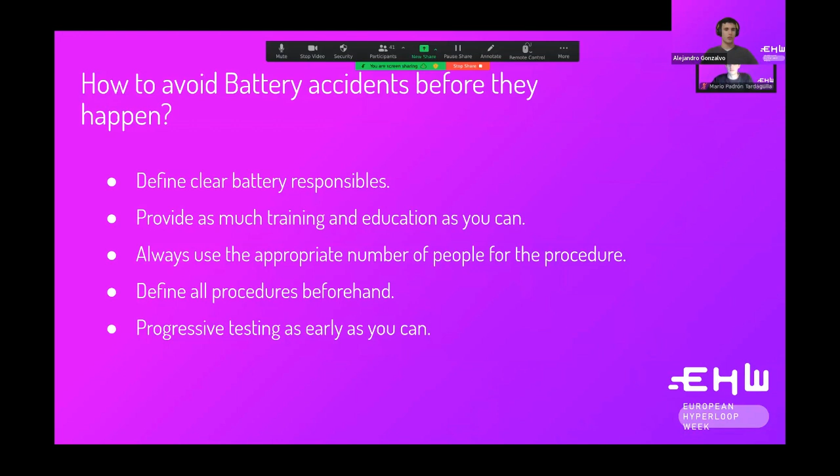It's also a nice way to get an education on high voltage without fully risking your life. So start with 50. When it works, add another pack. Now it's 75, now 100. Do not go all the way like, okay, it works with 50, we want to finish this deadline for this week, let's just put 300 volts and see if it works, because maybe it doesn't.

Now, necessary materials for high voltage procedure. First, personal protective equipment, PPE. Use high voltage rated insulating gloves, your typical yellow gloves. As a clarification, the freedom of your hands is also important for safety, so if you're working with 24 volts, there's no need for high voltage gloves. You can use more comfortable ones. Let's try to find the balance here.

Always use safety glasses, even if there are 0 volts, because a board could heat up and a capacitor could fly away and hit you in the eye and hurt you, so let's try to avoid that. Also use insulated work boots, which I believe don't need to be the big yellow boots, but can be some mountain-like boots, which are a lot more comfortable. Look into that.

Also use a Class D fire extinguisher. There are a lot of fire extinguishers, but I believe the Class D one works for all except grease and oil. It's the dry fire extinguisher, and it's the one that works for electric fires. Do not use one you find somewhere; make sure it has the appropriate certificate and that it's up to date.

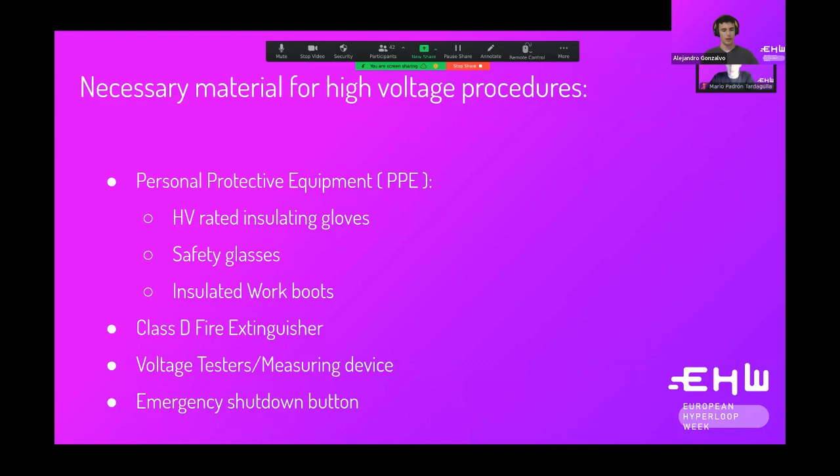And then, of course, use multimeters, voltage testers, and whatever else is needed. Always have an emergency shutdown button. It may be an MID, it may be an emergency button, it may be some command on your control station, but always have it prepared. Don't let someone have to say, okay, let's stop the pod, to stop the pod.

And then what happens if we fail all of that? What happens if an electrical fire happens? The consensus here is that there are 2 responsibles. Responsible 1 is the one manipulating the batteries, near everything, and responsible 2 is the one with the fire extinguisher. As soon as it happens, responsible 2 will press the fire extinguisher, and almost at the same time the other one will press the MID, whatever happens first, instantaneously. Once the situation is secured, dismount the setup quickly for damage control and call emergency services if necessary, then enclose damaged batteries in a non-flammable enclosure.

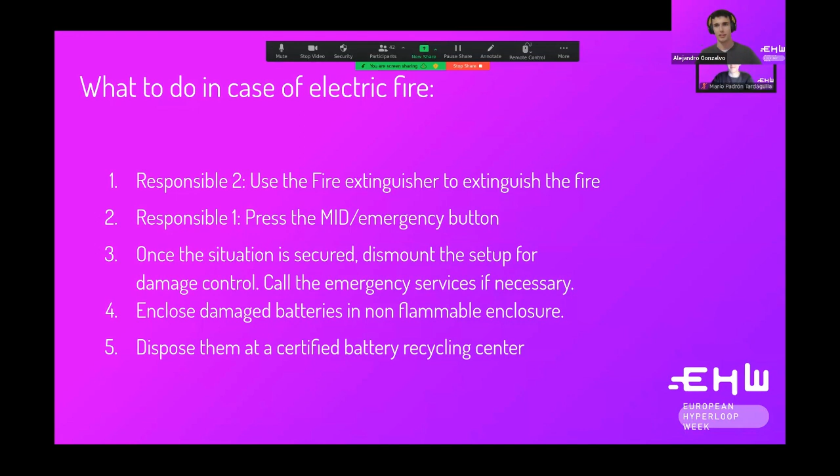So how do we know if a battery is damaged? Truth is, it's very complex. Companies with a lot of money, if there's a fire, just throw away all the batteries - that's the safest thing to do, and if you can do that, just do that. But we know batteries are expensive, so if you cannot, please do a thorough examination of every battery. If you have video recording, see which batteries got caught in the fire. If any battery has the minimum amount of physical evidence that there was a fire, throw it away at a certified battery recycling center. Do not throw it in a hole in the ground, because that's not a good thing to do.

Finally, something very important: charging batteries is very overlooked. That can pose a lot of risk, because same as if a battery gets discharged and you keep discharging it, it turns into fire, if you charge it above the 4.2 volts maximum voltage for Li-ion, it can also get very damaged. So use a certified charger for day-to-day charging, do not cut costs on this - just search the internet for a very good charger. Some teams try to build their own charger proposals for the competition; it's something very ambitious, and if you manage to have it done, you'll have it done by end of June. So in any case you'll need a certified charger - just go online, find one, and charge your batteries with that. End of story. And unless necessary, keep the state of charge in the linear zone.

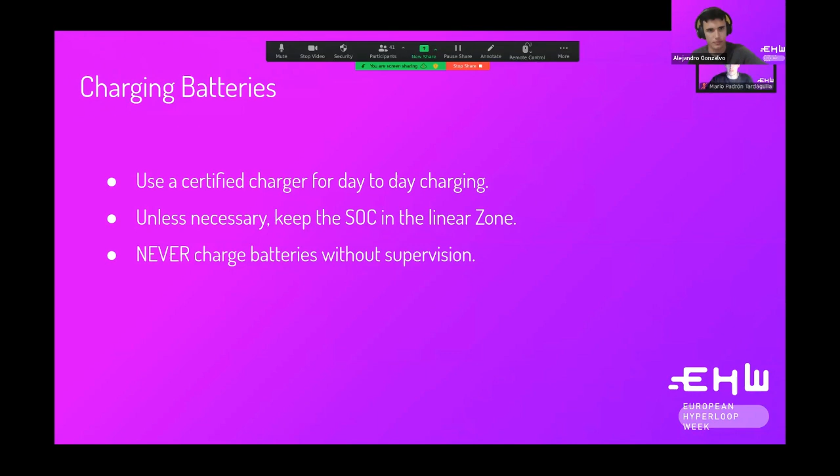Any questions? I think there's one question from Alexei. He asks, how do you prioritize the aspects of safety and which one is most important?

How do you prioritize aspects of safety? I think it's a very general question. Ideally you prioritize safety in itself - you want to cover everything. And if you cannot cover every critical aspect, do not do the procedure. Maybe some alternative answer, when an accident happens and it gets totally out of control, out of the scope of what we've seen in these slides, it's always the same procedure: protect yourself, make others know there's been an accident, like call emergency services or whatever, and then go help the person as quickly as possible. But if someone is having an electrical attack, do not go immediately and grab him, because you will have an electrical attack too. So does that answer the question?

Yes, thank you very much.

Maybe I can add something as well. I'd recommend you go through what a normal operation of your battery would be - charging it, discharging it, the normal operation - and go into what could potentially go wrong at each stage, looking at the risks of that, and basically set up a scale of risks of what is acceptable and what is not. Then you implement a mitigation strategy or a change in your design so that the risks that are not acceptable move into an acceptable level.

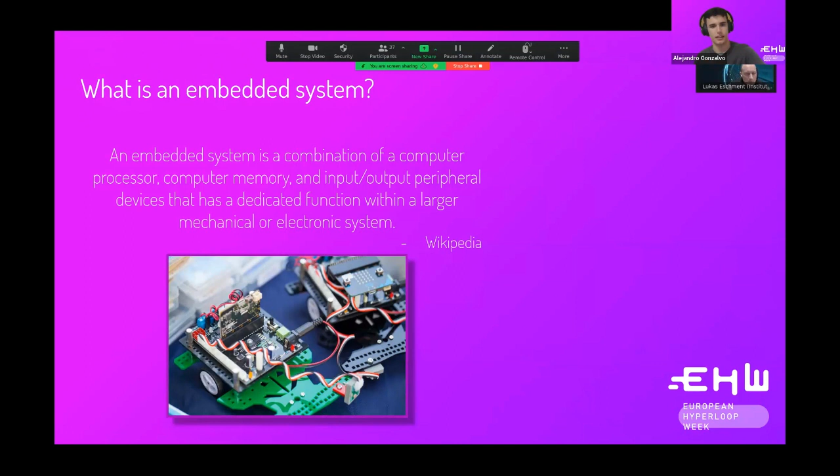So how to design embedded software? The first step is to actually design something. With this, I mean that when we want to design some mechanical system, it's pretty obvious that we have to go into CAD and start making some sketches, then do some simulations, then do some validation, and so on.

But sometimes when we develop code, we think we just start coding and suddenly the code starts building on itself, and then you have the complete system for the vehicle. Normally it's quite the opposite: you start coding, then realize your code doesn't meet the requirements, and then you have to build up on that badly written code.

So before you start to write the first line, make sure you have a minimum amount of work done. First, use UML diagrams. To be fair, I don't like UML diagrams, I think they're pretty boring, and I think you have to take a lot of time to make them. But as much as I hate to admit it, they are very useful because they are the standard way of communicating software or communicating requirements. And it will be documentation in itself for the next years.

Imagine you had a sponsor from a very good software company. Let's say you get a sponsor from Google, and Google says, okay, we can send this engineer, this tech lead, to help you with your system and advise you, because that's a very common form of sponsoring these days for teams. Teams get people inside companies to give them advice. If your code is just a bunch of hand-drawn sketches, that person who takes the day to come help you will spend the whole morning trying to understand those sketches.

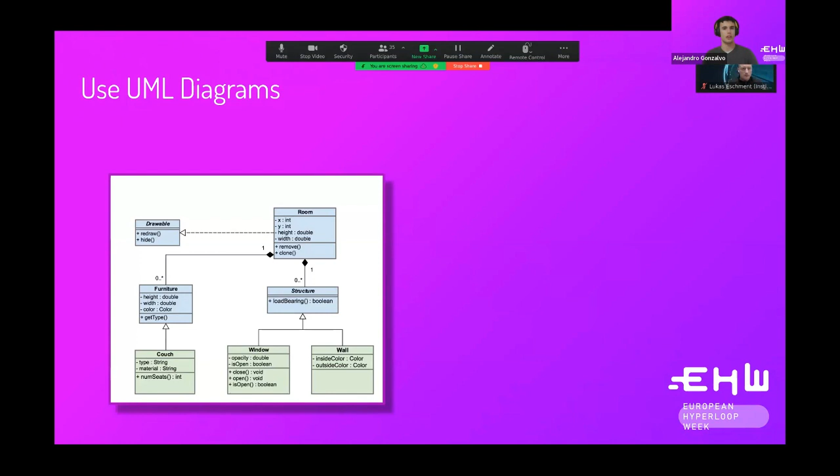Also use some kind of version control. Let's try to keep it a bit out of brand here, but the main leading version control software is Git, and it works pretty well.

Reasons why you would want to use version control: history tracking, which is a form of documentation in itself. You want to see, okay, when did we actually implement this feature? Who implemented it? What did we implement? That kind of history is what you want to track always.

There's also branching and merging. Branching is when you have a version of your code and then you create a parallel timeline, let's say, and then you work adding an experimental feature in that timeline without modifying the stable version. So if someone needs the code for tomorrow for the vehicle, they will not find your unfinished experimental feature, they will find the stable version.

So that's what I've done. Merging is the opposite process, when you grab your parallel timeline and you merge it, once of course it's been reviewed a thousand times and you have tested that it works. Another reason to use version control is to do a code review, because before merging, your other colleagues can review that code.

I think it's a very beneficial process, because it doesn't only help to spot errors, but it also helps everyone to know the code. In an environment as agile as a Hyperloop team, someone might not be able to come to work one day, and you'll have to do the work they didn't do, so you'll have to know their code. Code review is a nice way to overcome that barrier.

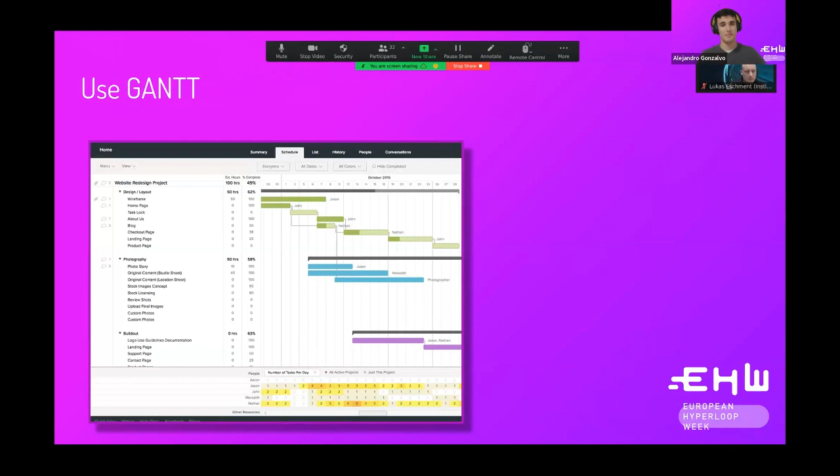Another thing is to use a Gantt chart. That's the last thing I'd say to make software requirements, which is pretty straightforward. On the y-axis you have a bunch of tasks of the project, and on the x-axis you have the timeline for the dates, and you can assign responsibles. Just write all the tasks you have to do and check that no one has overlapping tasks, because if someone has overlapping tasks, it probably means you won't finish on time.

And then the final and probably most important part: how to set up requirements for the code itself. When you set up requirements, you say, okay, we need code that can read from those sensors at this rate and send this kind of message to the control station. With that, you obtain code that does what is requested, and you don't need to write code that does everything.

This is pretty clear when, for example, you're building communication. It might be very fancy to build an omnipotent communication system that can do everything, but most of the time it will be a daunting task. If you're able to do it, that's fine, but it's a lot easier if you say, okay, what size packet are we going to use? We can use a 32-bit size packet, and then your packets can be fixed size. If your data is smaller, just add zeros at the end or wherever. It makes a lot of things easier.

Also communicate with other subsystems, because you can have this problem like, do we need to build our own ADCs that read voltages at this speed? I don't know, but that's not a question for you. Just ask the levitation guys what rate of information they need for control, and ask the same to the propulsion guys, and that should answer your question.

Now we can actually start to code after setting all these requirements. Some bad coding practices you want to avoid, seen in previous editions, are hard coding a lot of values, not doing any error handling, ignoring real-time constraints, and postponing things that are never done. The most important and most technical of these is probably the real-time constraint.

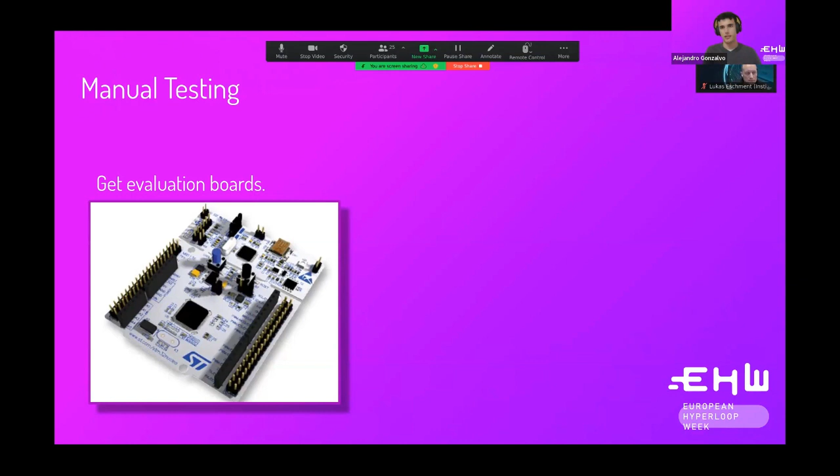And get evaluation boards. This is something that I think all teams do, but if you're not doing it - you create your custom hardware boards, and they use a microcontroller. Probably there's an evaluation board for that microcontroller, a board that uses that same microcontroller but has all the hardware around it validated. So if you upload some code to a board and it doesn't work, then you have this discussion: is it my code that doesn't work, or is it the board? That's pretty easy to solve because you go to the evaluation board and upload it there. If it works on the evaluation board, it's the hardware; if it doesn't, then it's your code. So that saves a lot of time.

And then after all of that is done and validated, you can implement unit testing, which means everything that doesn't require physical testing can be tested automatically. So this means you grab some functions - for example, you want to test that some arithmetic is done correctly. So you create a function that grabs your actual code and says, okay, I'm going to test this, and if it doesn't return 4, it's a mistake. This is very difficult to do in firmware because most things do require physical components.

You always need some kind of sensor, you always need some kind of battery. So what we can do is mock up these things, meaning we can just build a toy version of that thing.

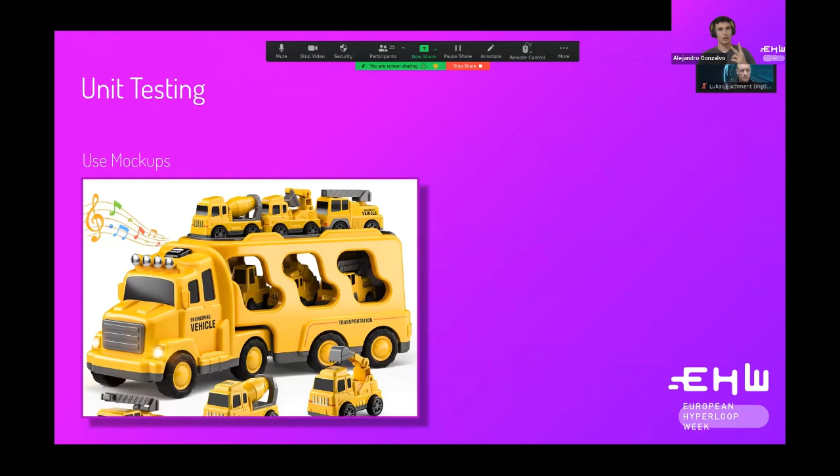For a sensor, it's pretty straightforward. If you want to test your code, you do not need a fully functional sensor. You can use just a function that returns a random value, and that will be your sensor. With that, you can test your code, test if the value goes out of bounds, and test if it reads at the intended frequency.

After all those things, you can do integration testing. This is very important because when put together, things always break. Something might work — module A works, your control station works, your sensor reading works. But suddenly when you put them together, they don't work because problems only appear when combined. So before putting things together as late as possible in the competition, try to do it very early.

Try to be good on time. Try to have anything finished by March, and then start integrating things. Also very important: make sure the individual modules are properly validated, because integration testing is useless if, when things don't work, you start to doubt whether the module itself didn't work well. No, things should work very well individually and then you tie them together.

For this, it is not necessary to go into every specific value. Just use the real environment you'll have at the demonstration day. If it works with those values, it will probably work. So, any questions?

Again, I don't see any questions. I just had one thought that came into my mind — you said Gantt charts are important.

Yes, Gantt charts are important also for mechanical engineering. Because if you have a wheel or a gear that needs to be heat treated and you don't take that into account at the beginning, and it gives you six weeks on top at the end, that's game over. I like your prototyping ideas as well.